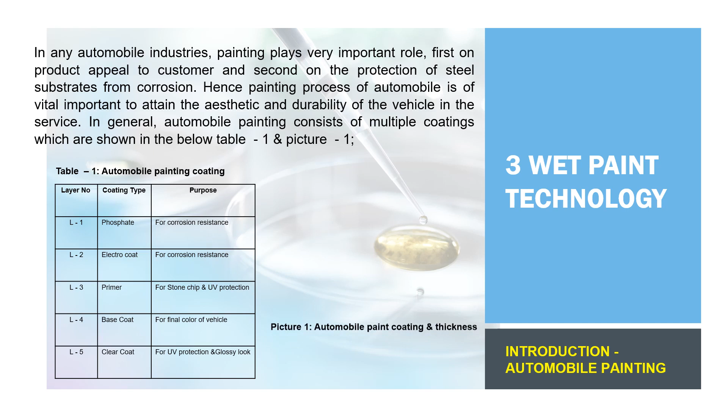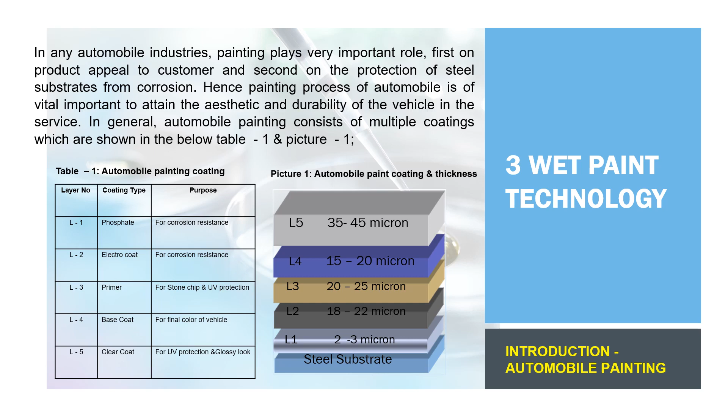In any automobile industries, painting plays a very important role—first on product appeal to the customer, and second on the protection of steel substrates from corrosion. Hence painting process of automobile is of vital importance to attain the aesthetic and durability of the vehicle in service.

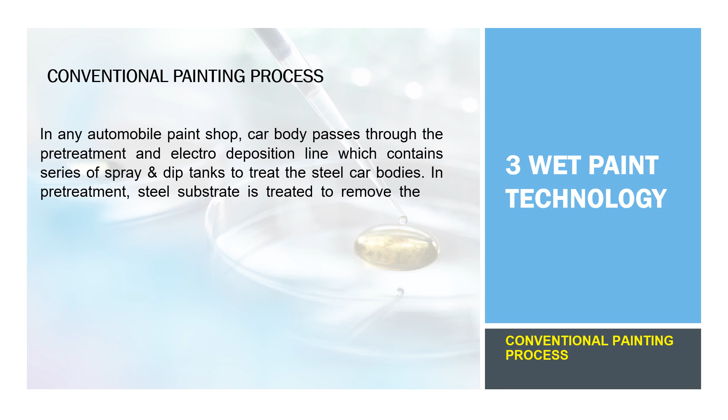In general, automobile painting consists of multiple coatings, shown in table 1 and picture 1. Conventional painting process: in any automobile paint shop, the car body passes through the pretreatment and electro-deposition line, which contains a series of spray and dip tanks to treat the steel car bodies. In pretreatment, the steel substrate is treated to remove oil and finally get coated with a tricationic zinc phosphate layer. In electro-deposition, most OEMs use the latest generation cathodic E-coat paint for better throw power and smooth finish, along with higher transfer efficiency.

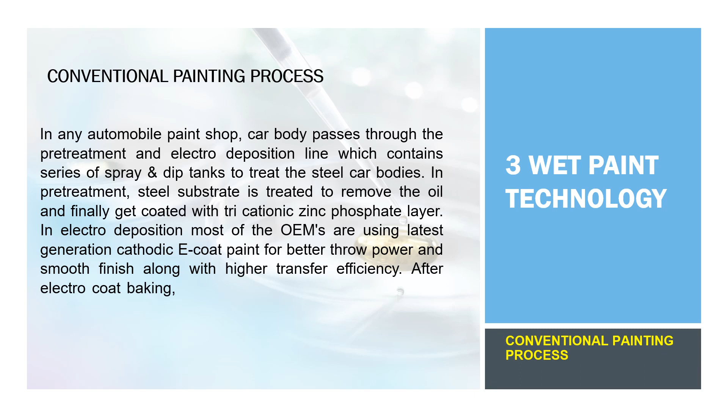After electro-coat baking, the sheet metal joints are sealed with PVC-based sealer to prevent water leak, provide sound dampening, and prevent corrosion, followed by the application of underbody coating in the underbody.

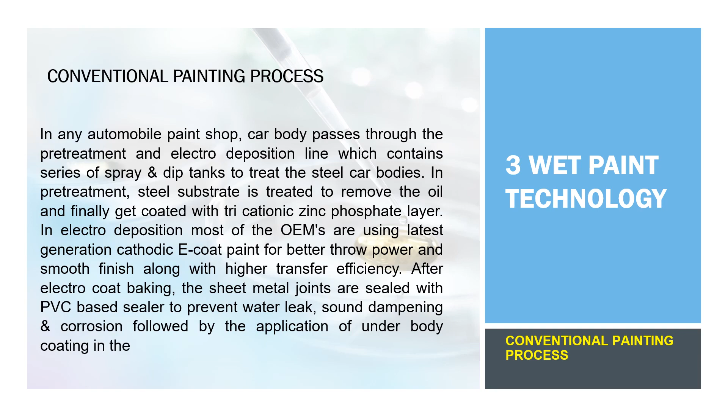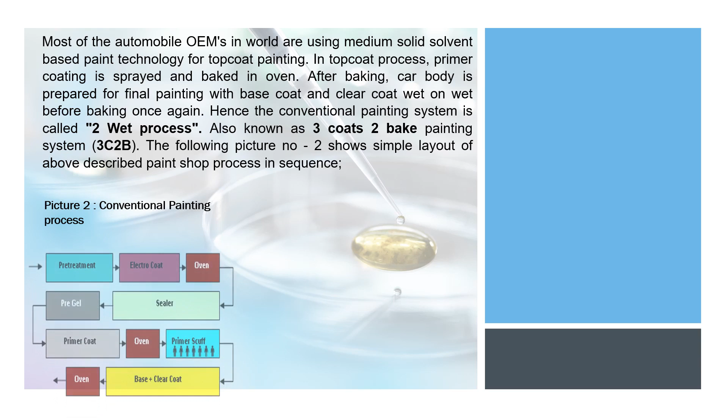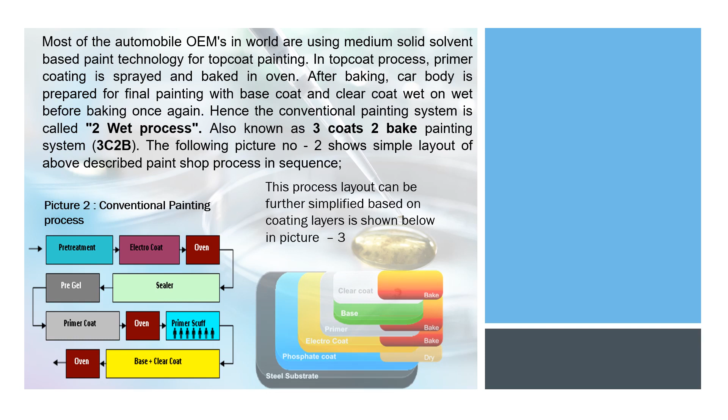Most automobile OEMs worldwide use medium solid solvent-based paint technology for top-coat painting. In the top-coat process, primer coating is sprayed and baked in an oven. After baking, the car body is prepared for final painting with base coat and clear coat applied wet on wet before baking once again. Hence the conventional painting system is called the 2-wet process, also known as 3 coats 2 bake painting system, 3C2B.

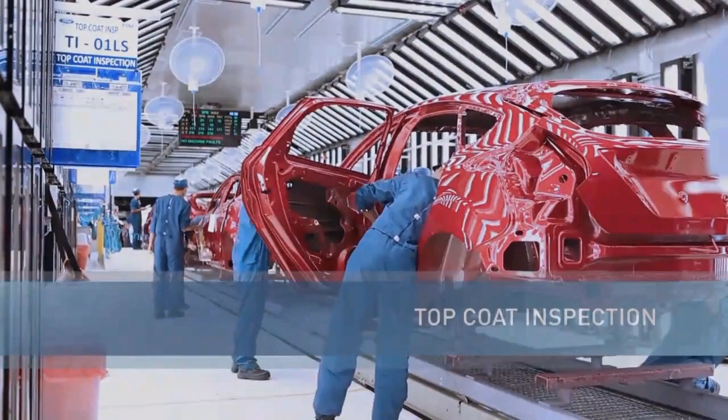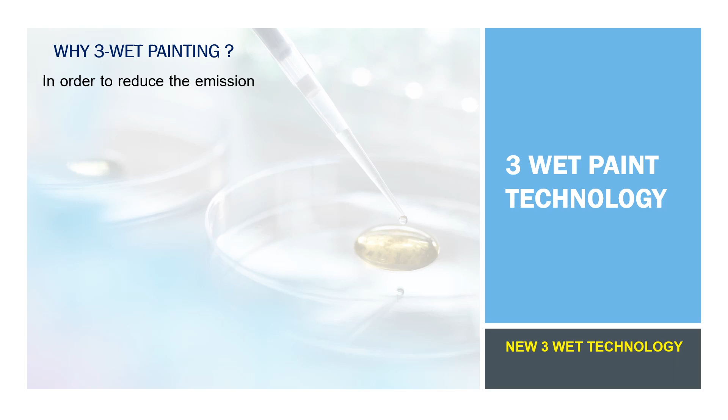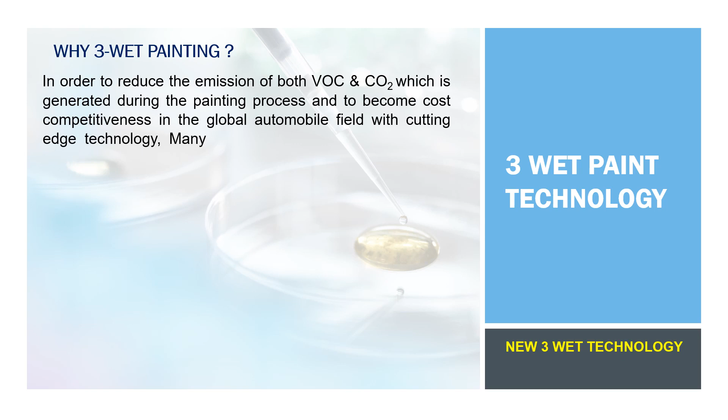Why 3-wet painting? In order to reduce the emission of both VOC and carbon dioxide generated during the painting process, and to become cost competitive in the global automobile field with cutting-edge technology, many auto industries have adapted the new 3-wet high solid based paint technology in conjunction with global paint suppliers.

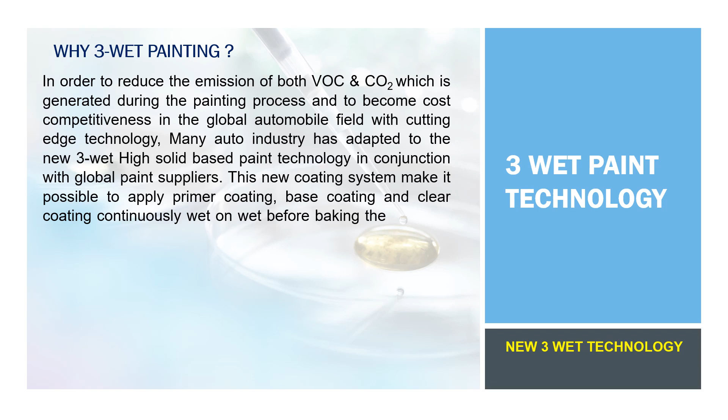This new coating system makes it possible to apply primer coating, base coating, and clear coating continuously, wet on wet, before baking the car body in the oven. With this change, there is no requirement for a separate primer scuff booth, primer booth, and primer oven. Hence the new process is named the 3-wet process, 3C1B.

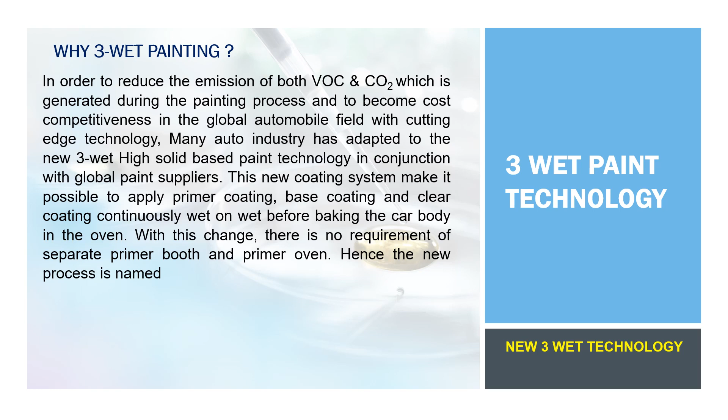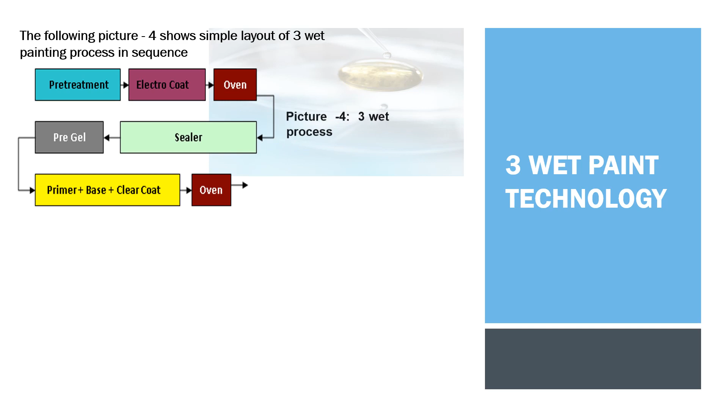Picture 4 shows a simple layout of the 3-wet painting process in sequence. The above modified process layout can be simplified based on coating layers, as shown below in picture 5.

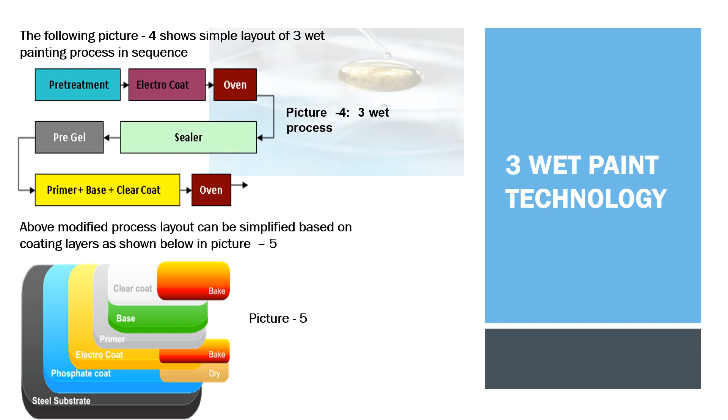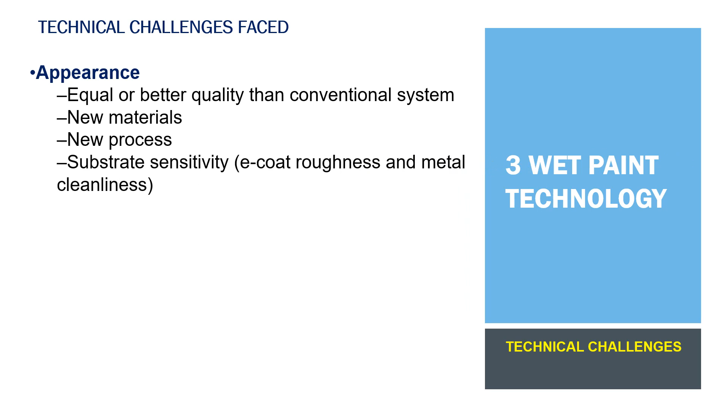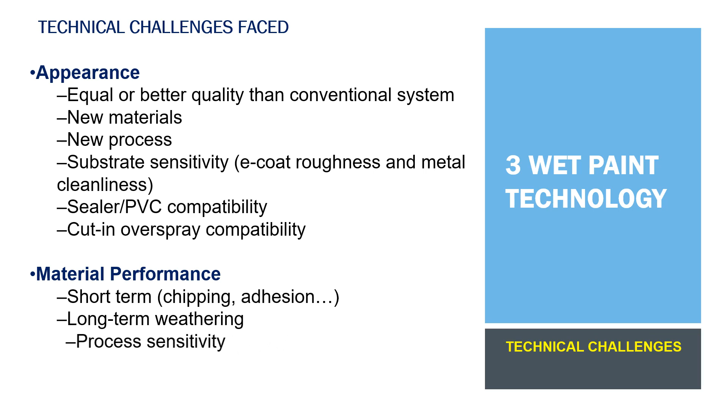Technical challenges faced: Appearance—equal or better quality than the conventional system. New materials, new process. Substrate sensitivity, E-coat roughness, and metal cleanliness. Sealer PVC compatibility, cut-in overspray compatibility. Material performance: short-term chipping and adhesion, long-term weathering. Process sensitivity: migration of additives and low molecular weight molecules.

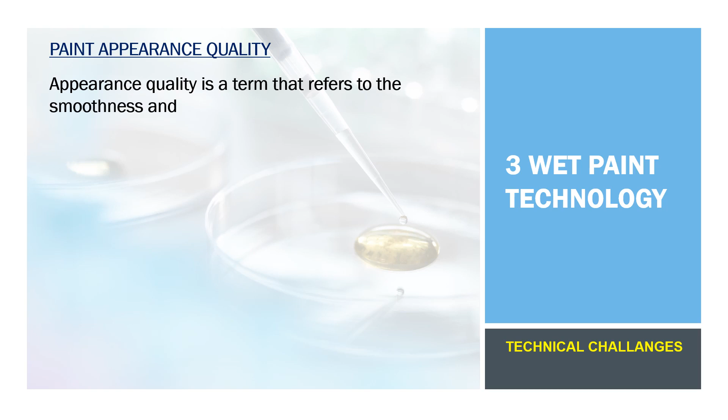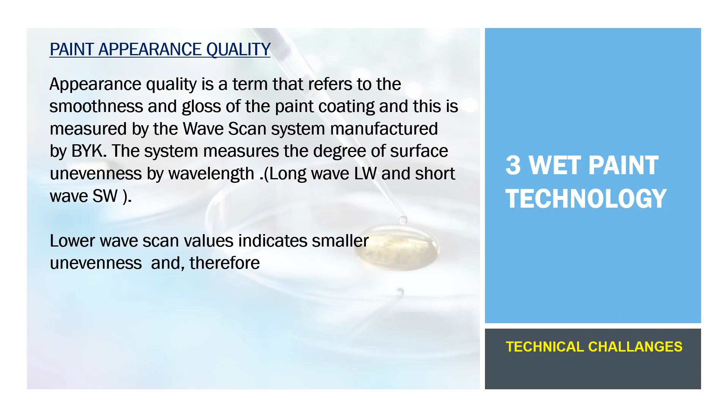Paint appearance quality refers to the smoothness and gloss of the paint coating, measured by the wave scan system manufactured by BYK. The system measures the degree of surface unevenness by wavelength—long wave (LW) and short wave (SW). Lower wave scan values indicate smaller unevenness and therefore higher appearance quality. Smoothness is related to LW unevenness, and gloss is related to SW unevenness. Therefore, reducing this unevenness is regarded as key for improving appearance quality.

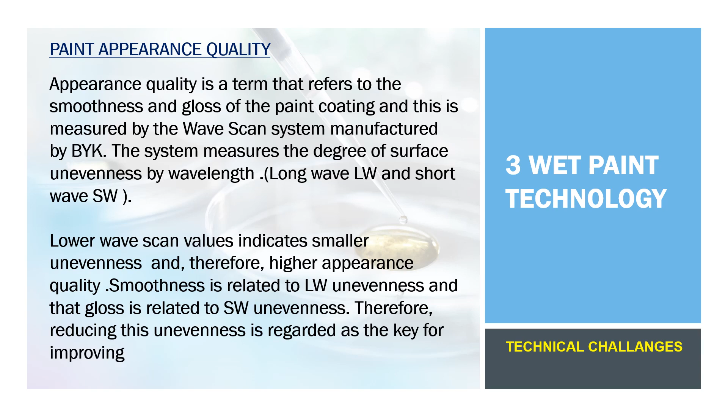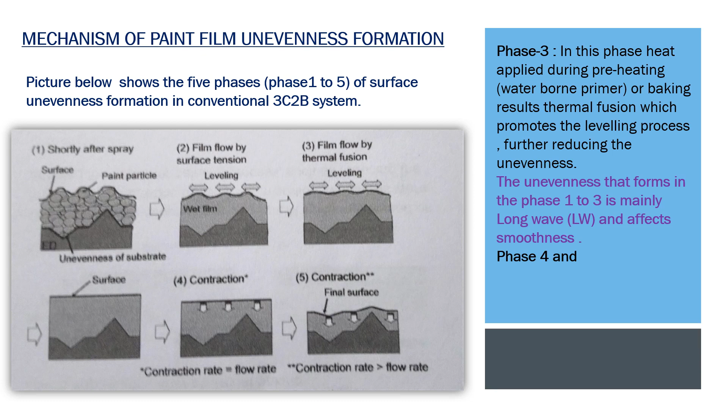Mechanism of paint film unevenness formation. Phase 1: unevenness forms shortly after spraying the primer onto the ED-coated body surface. The unevenness of the ED-coated surface, the RA value, is an important factor affecting the unevenness of the primer surface film. Phase 2: the degree of unevenness changes due to the flow of the primer paint film created by surface tension, a process called leveling. The degree of leveling increases as the viscosity of the flowing primer decreases. Phase 3: heat applied during preheating of the water-borne primer, or baking, results in thermal fusion, which promotes the leveling process, further reducing the unevenness. The unevenness that forms in Phase 1 to 3 is mainly long wave, LW, and affects smoothness.

Phase 4 and Phase 5: in these phases, the final baking is applied after the application of clear coat. This promotes reactions and contraction that reduce or stop the flow of the paint film. After the film flow stops, the unevenness of the substrate and underlayers is transferred to the top surface. The fine unevenness that controls the quality of gloss is formed by volume contraction during a later phase than the unevenness that affects smoothness, toward the end of the baking process. The unevenness that forms in Phase 4 and 5 is mainly short wave, SW, and affects gloss.

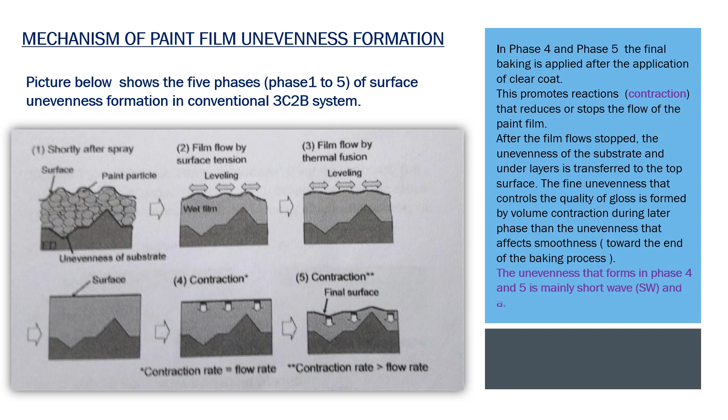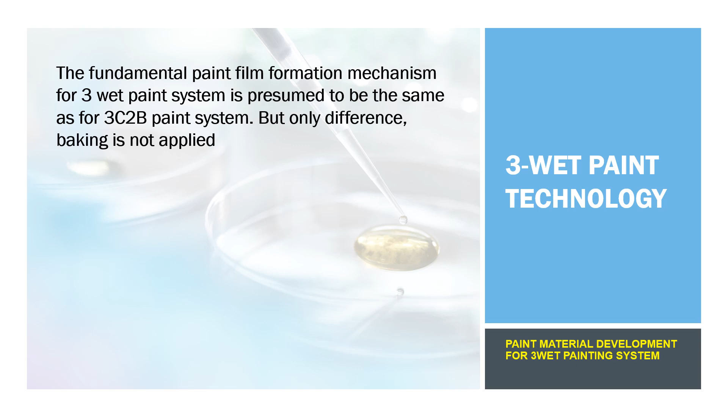The fundamental paint film formation mechanism for the 3-wet paint system is presumed to be the same as for the 3C2B paint system. The only difference is baking is not applied after primer application, followed by base and clear coat wet on wet.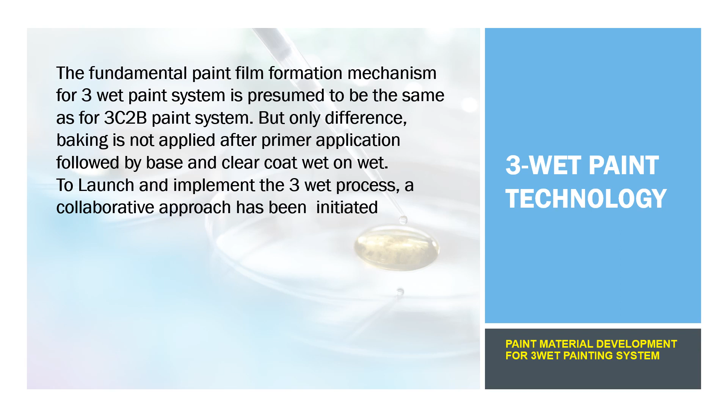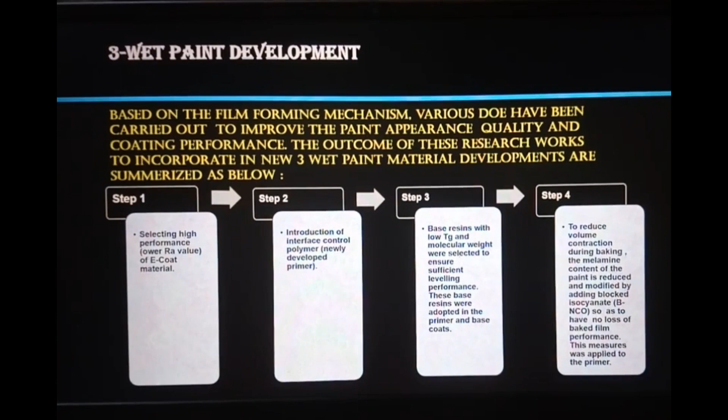To launch and implement the 3-wet process, a collaborative approach has been initiated along with paint and facility suppliers. Detailed and exhaustive development work has been carried out for facilities and paint material developments. Based on the film forming mechanism, various DOEs have been carried out to improve the paint appearance quality and coating performance.

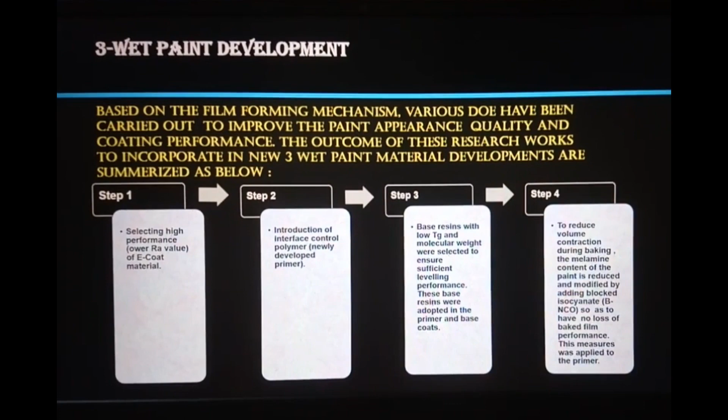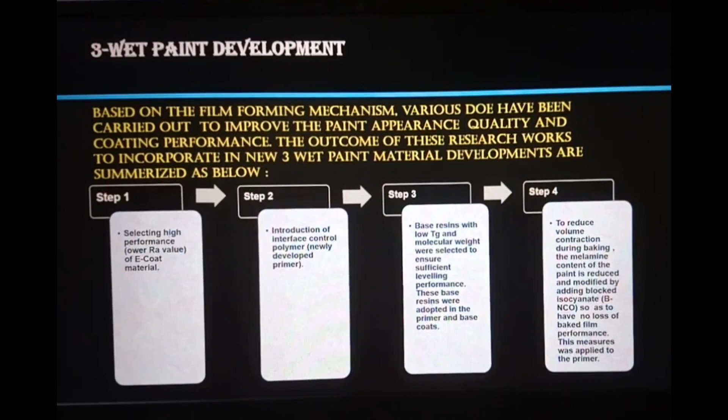Step 2: Introduction of interface control polymer, a newly developed primer. Step 3: Base resins with low Tg and molecular weight were selected to ensure sufficient leveling performance. These base resins were adopted in the primer and base coats.

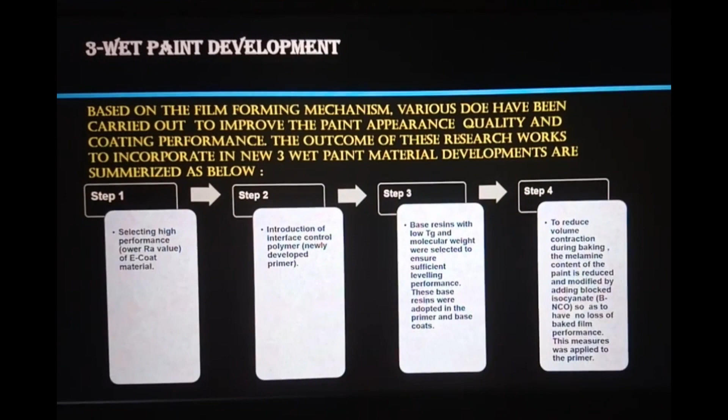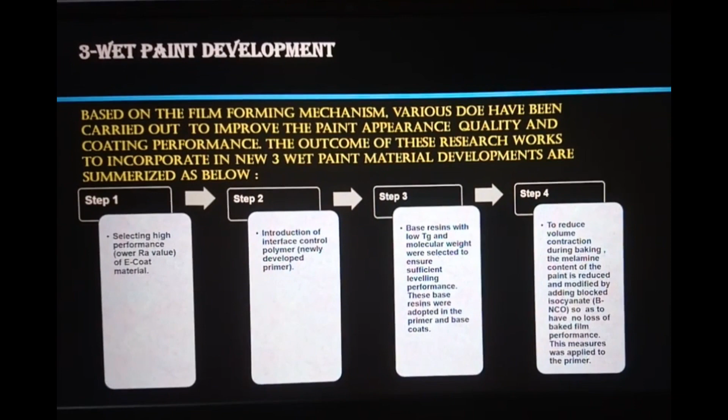Step 4: To reduce volume contraction during baking, the melamine content of the paint is reduced and modified by adding blocked isocyanate, so as to have no loss of baked film performance. This measure was applied to the primer.

Paint material development for the 3-wet painting system. 3-wet paints are very sensitive to merging between primer and base coats, since all 3 layers - primer, base and clear coats - are applied wet on wet. To prevent this, we developed a new resin called an interface control polymer, which is added to the primer paint.

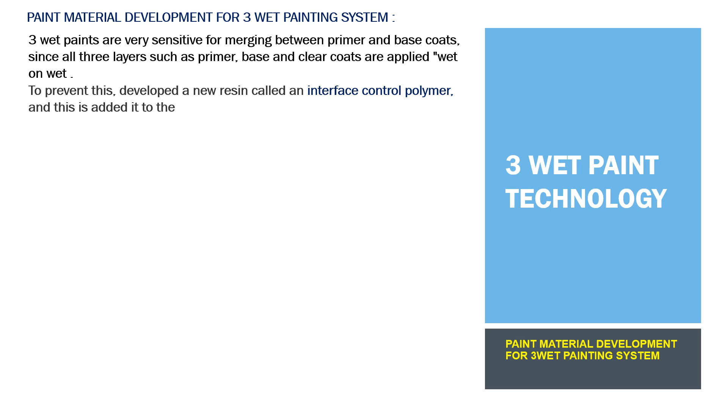When the primer is applied, the interface control polymer creates a barrier layer on the paint surface. Though uniformly dispersed throughout the primer when applied, the larger molecules of the interface control resin are soon drawn to the surface of the thin paint layer by surface tension, where they form a highly viscous barrier layer at the interface between the primer and base coat.

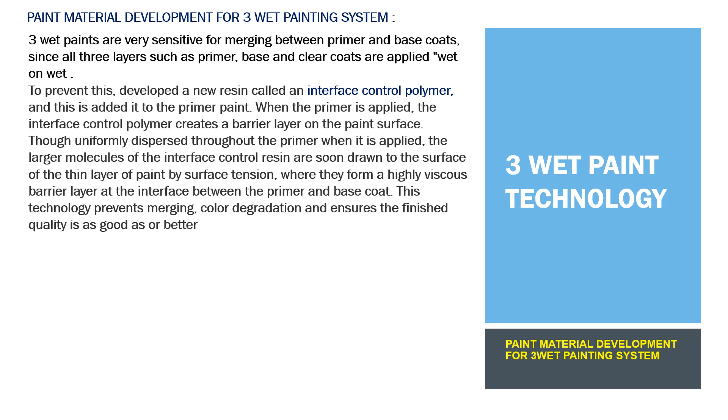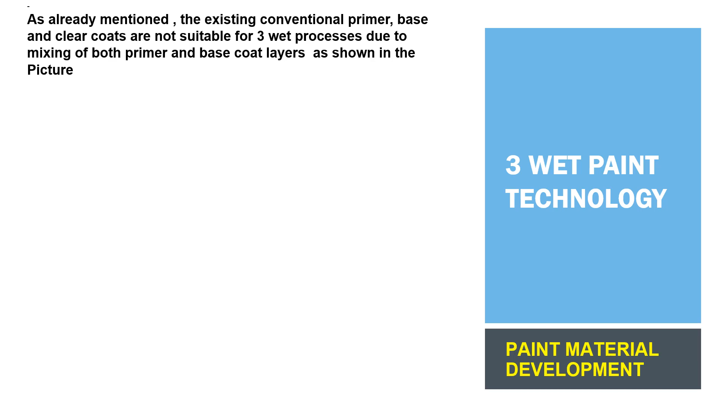This technology prevents merging and color degradation, and ensures the finished quality is as good as or better than conventional coating methods. As already mentioned, the existing conventional primer, base and clear coats are not suitable for 3-wet processes due to mixing of both primer and base coat layers, as shown in picture 6.

Hence, paint material suppliers developed new high-solid primer, base and clear coat paint materials by upgrading the resin and backbone chemistry through introduction of boundary control resins in the primer, to avoid mixing with the base coat layer, as shown in picture 7.

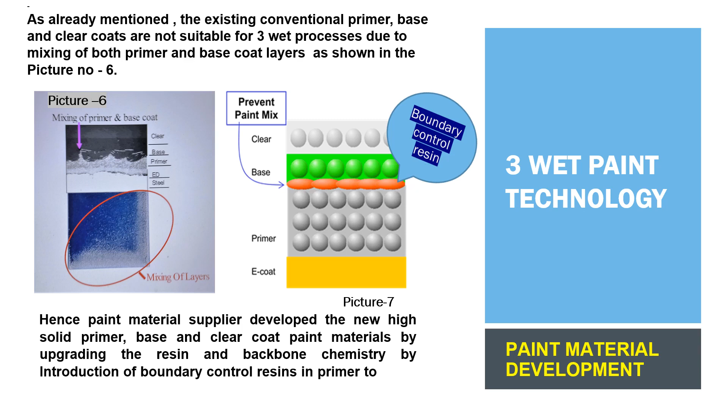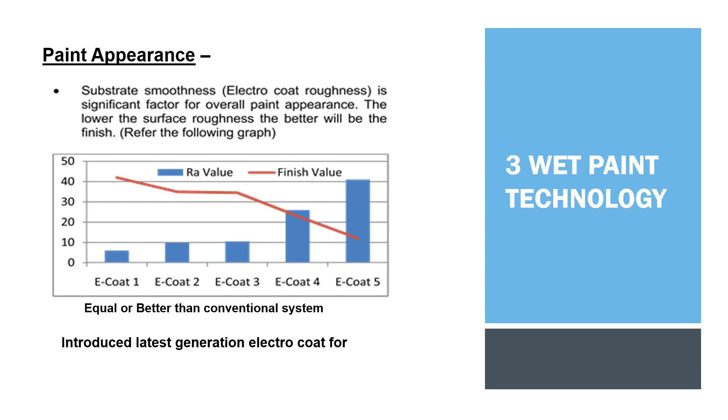Paint appearance: substrate smoothness, or E-coat roughness RA value, is a significant factor for overall paint appearance. The lower the surface roughness, the better the finish will be.

Comparison of appearance quality of the developed 3-wet paint system, the current 3-wet paint system, and the 3C2B paint system. Figure 8 shows the wave scan measurement results at various parts on the body surface. The developed 3-wet paint system has better LW and SW values than the current 3-wet paint system, and almost the same or better than the 3C2B paint system.

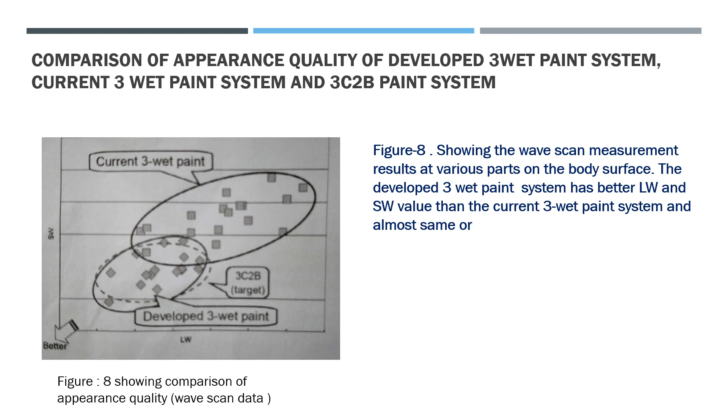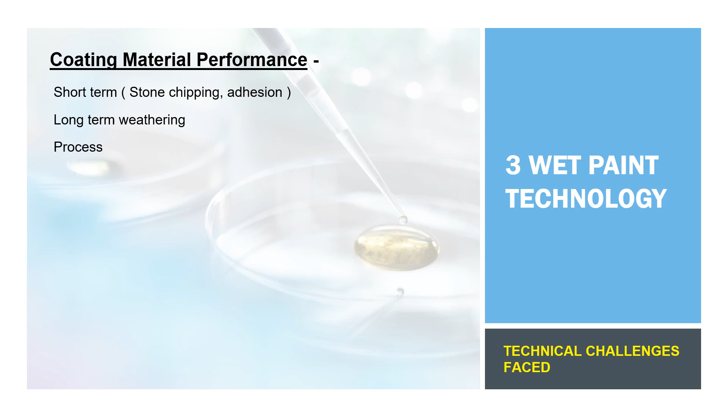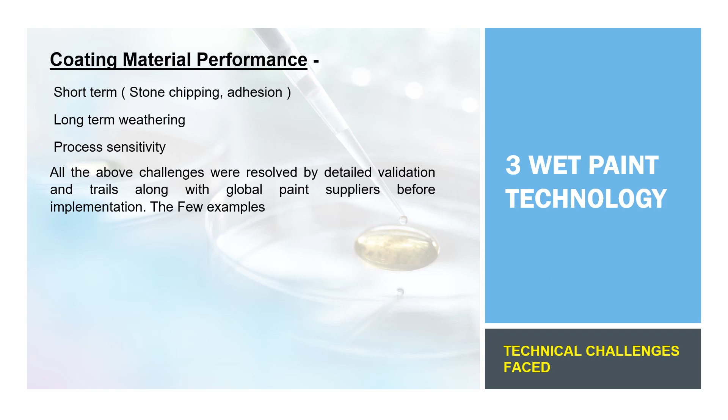Coating material performance considerations include short-term stone chipping and adhesion, long-term weathering, and process sensitivity. All these challenges were resolved through detailed validation and trials along with global paint suppliers before implementation. A few examples: stone chip resistance measured by the SAE J400 technique shows results comparable to and better than the conventional painting system.

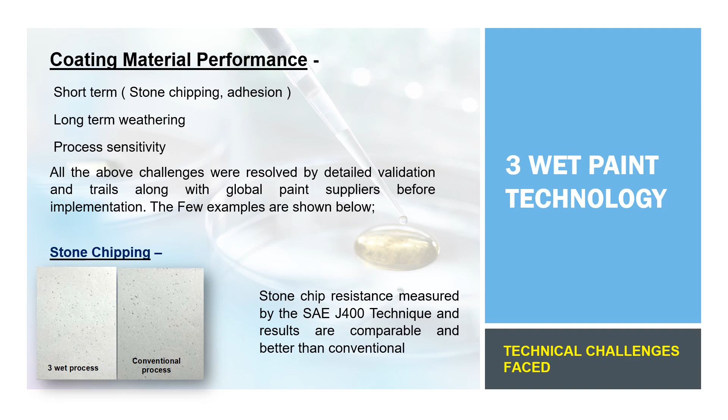Photo-oxidation accelerated weathering testing shows the 3-wet materials performing better than the current system.

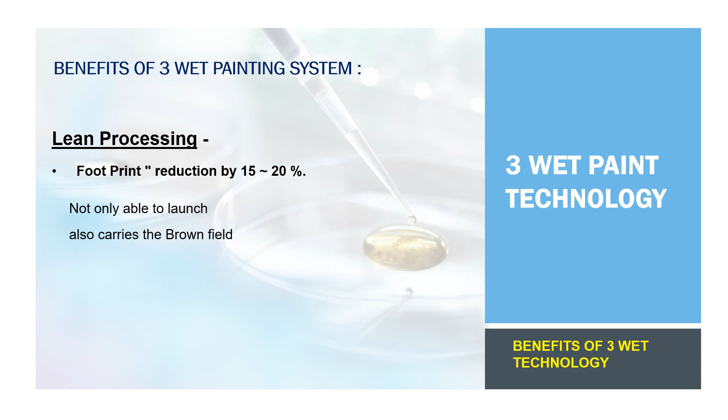Benefits of the 3-wet painting system: Lean processing with footprint reduction by 15 to 20%. It is able to be launched not only in greenfield projects but also carries brownfield conversion capability. Elimination of the primer booth, scuff and oven leads to reduction of plant investment, and reduction in dock-to-dock overall paint process time by 33%.

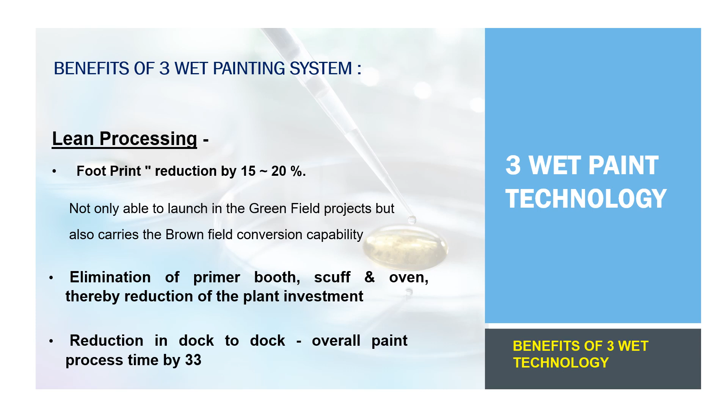Economics: capital investment reduction of 15 to 25%. Savings in variable costs - energy by 30-35%, fuel by 20-25%, and labor by 10-15%. Paint consumption reduction by 30-40%.

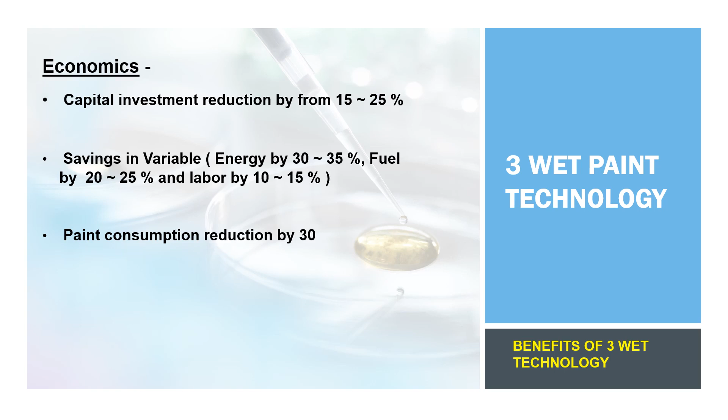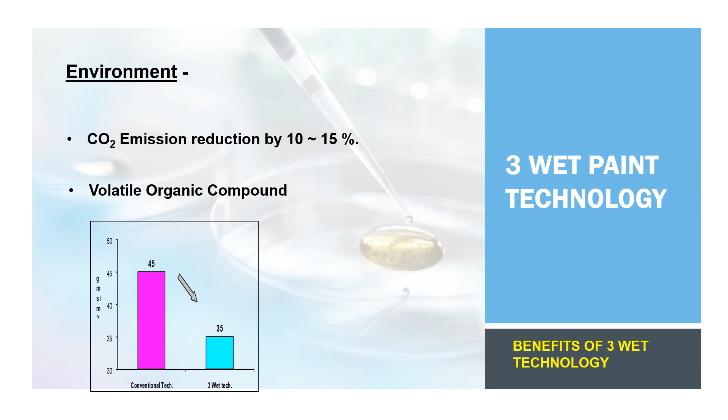Environmental benefits: carbon dioxide emission reduction by 10-15%, and volatile organic compound emission reduction by 25%.

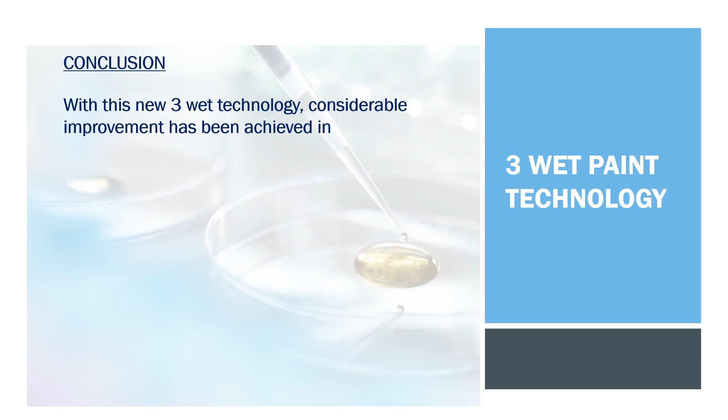With this new 3-wet technology, considerable improvement has been achieved in environmental emissions, apart from significant cost reduction through reduction of paint consumption, power, fuel, and manpower resource optimization.

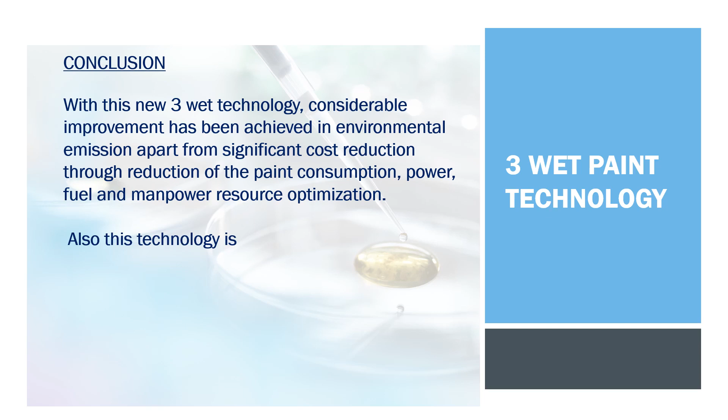This technology is also very suitable for any greenfield project, since millions of dollars can be saved in the initial investment phase itself due to the reduction in shop floor footprint. However, the 3-wet technology will take the next 3 to 5 years to gain popularity in the automobile painting process for 100% adoption by all automobile OEMs.